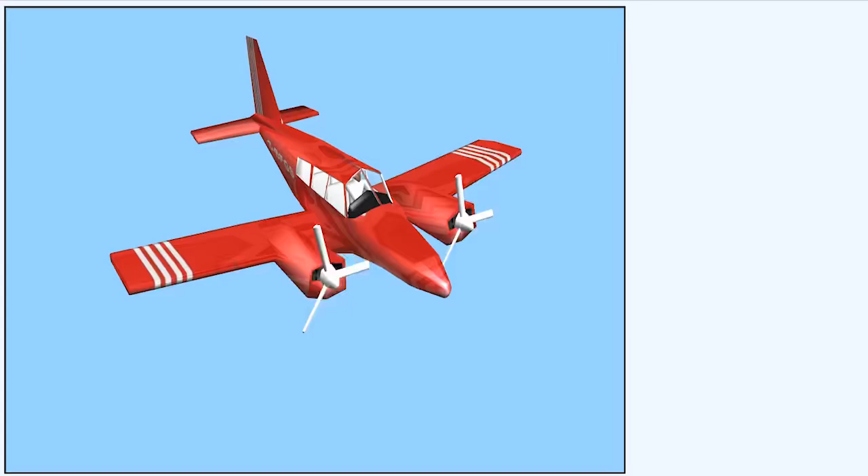Should an engine fail in flight, its propeller control unit would sense a drop in RPM, and, in an attempt to maintain the pilot's selected RPM level, would move to the underspeed or fine pitch position. Centrifugal moments acting on the blade would cause it to rotate towards fine pitch.

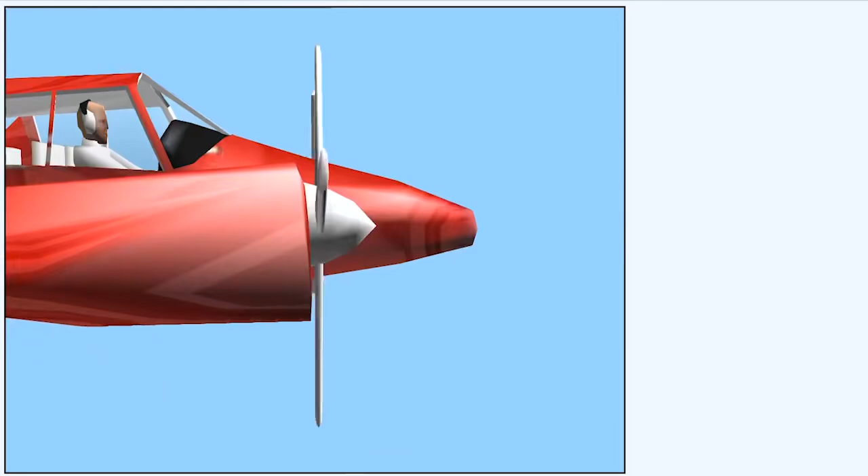This would result in the propeller being put into a windmilling situation, with its pitch change piston abutting the fine pitch stop. The immediate result of this would be a very large asymmetric drag, which would yaw the aircraft violently towards the failed engine.

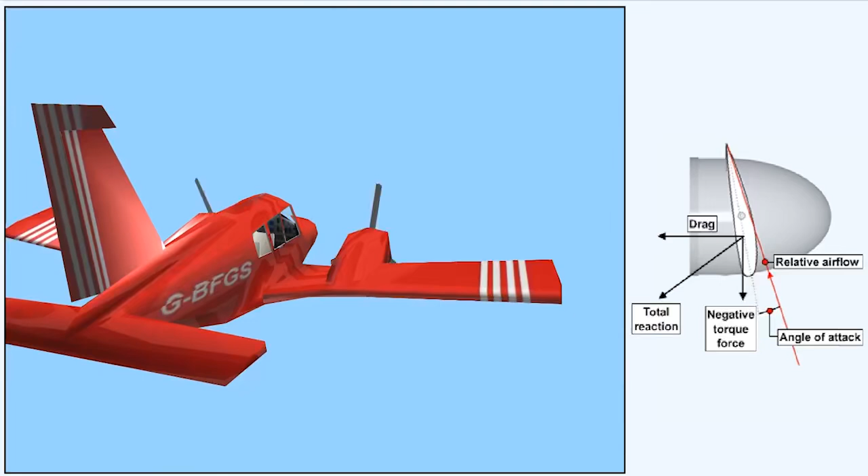A second possibility, if the propeller continued to windmill and drive the engine, could be a complete mechanical breakdown of the engine, and even an engine fire.

So, to minimize drag, and also to prevent further possible damage to the engine and the aircraft, some propellers, particularly on multi-engined aircraft, are provided with a means of turning the blades edge-on to the air flowing over them. In this edge-on position, where no aerodynamic force is generated either forwards or backwards, the propeller will cease to rotate.

This action is called feathering the propeller.

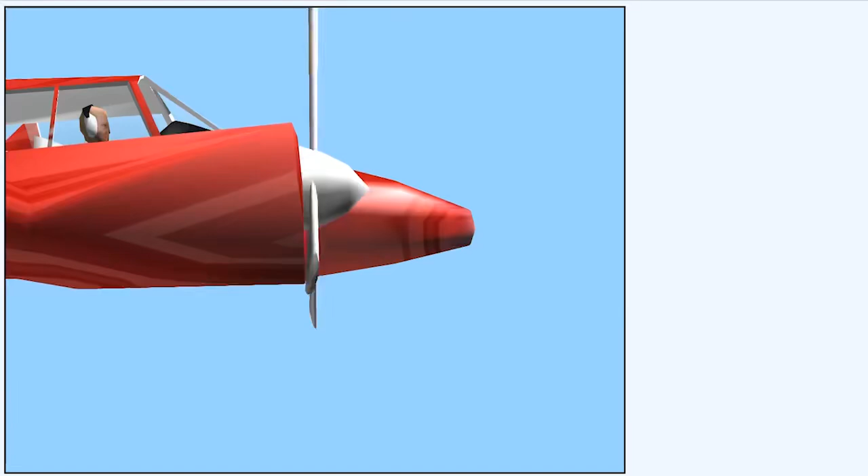If the engine had actually failed, there would be no requirement to unfeather its propeller. However, propeller manufacturers usually provide an unfeathering facility, by means of which, if appropriate, an engine restart may be attempted. This may be a requirement following asymmetric flight practice.

The operating principle of the propeller control unit incorporated in a feathering propeller is similar to that previously discussed, in that the unit contains an oil pump to boost oil pressure delivered from the engine or reduction gearbox, and a hydromechanical governor for RPM control.

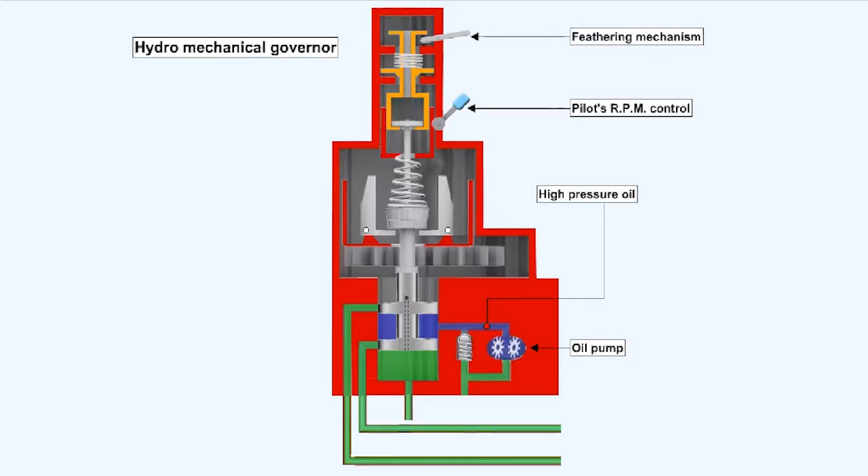There is, however, the addition of a feathering mechanism, the operation of which will be discussed progressively throughout the lesson. Control units with feathering mechanisms may be found on both turboprop or reciprocating aero engines.

Dependent on the manufacturer and type of propeller system, the controller may be known as a propeller governor, a constant speed unit, CSU, or a propeller control unit, PCU. For the remainder of this lesson, we'll refer to the unit as the propeller control unit, or PCU.

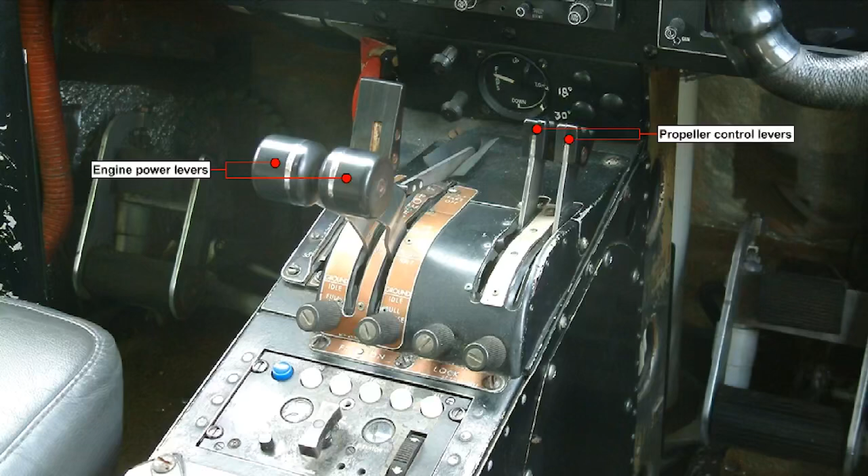The controls available to the pilot are, again, dependent on type. Most spark ignition piston engines, and many turboprop engines, are equipped with a twin-lever cockpit arrangement, whereby the pilot has separate engine power and propeller control levers.

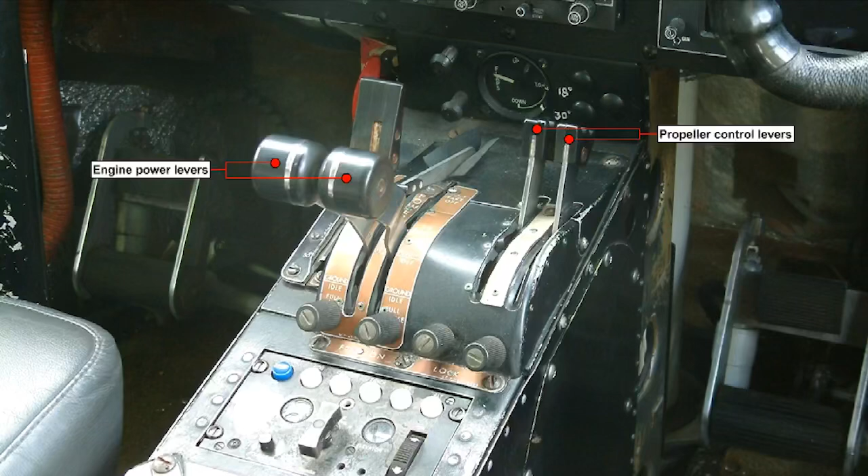In this arrangement, propeller feathering can be manually achieved by moving the propeller control lever to the feather position, or on some aircraft, by means of a separate feather lever.

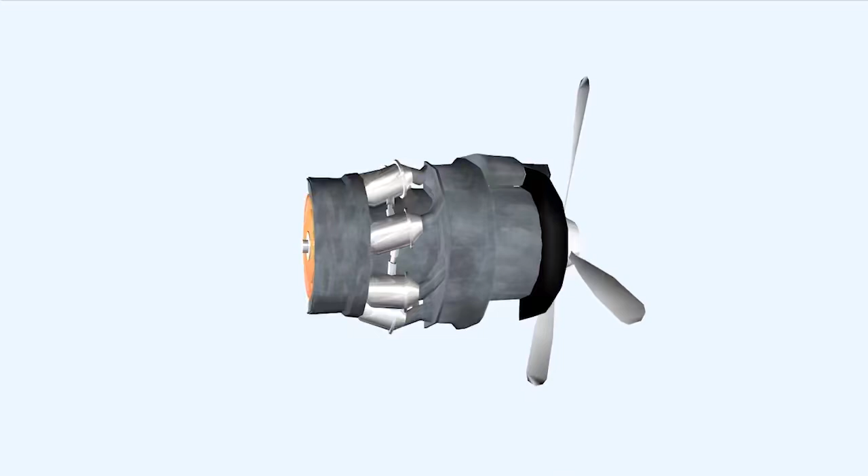Some turboprop engines utilize a single lever arrangement, whereby the pilot is provided with a power lever only. In this arrangement, propeller pitch, RPM, and engine fuel flow, power, are simultaneously adjusted. Feathering may be achieved by moving the engine high-pressure fuel cock to the feather position.

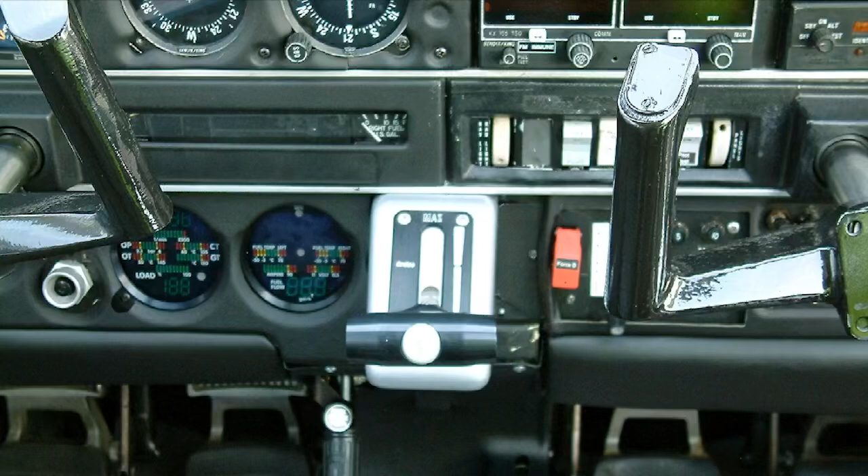New generation reciprocating engines equipped with Full Authority Digital Engine Control, or FADEC, also use a single lever arrangement, whereby the pilot selects the required power setting and the propeller pitch angle is controlled either electronically by an electronic engine control unit or by a hydromechanical control unit.

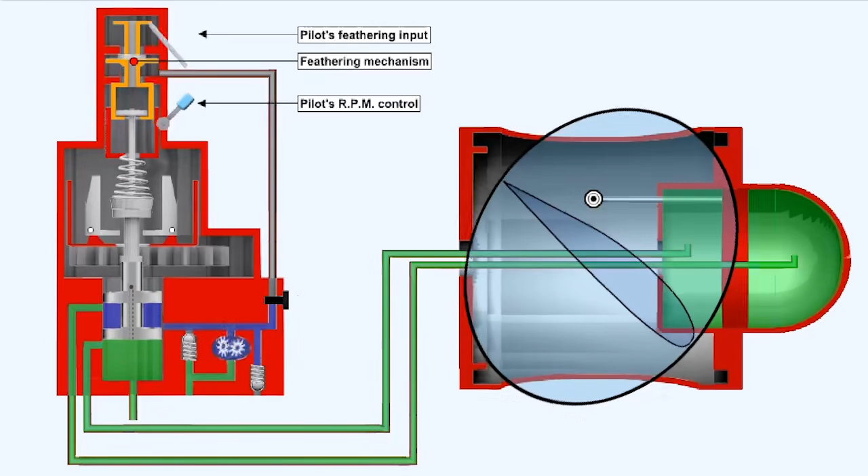The feathering mechanism provides a means of manually lifting the landed valve to the overspeed or coarse pitch condition when the appropriate control is moved to the feather position.

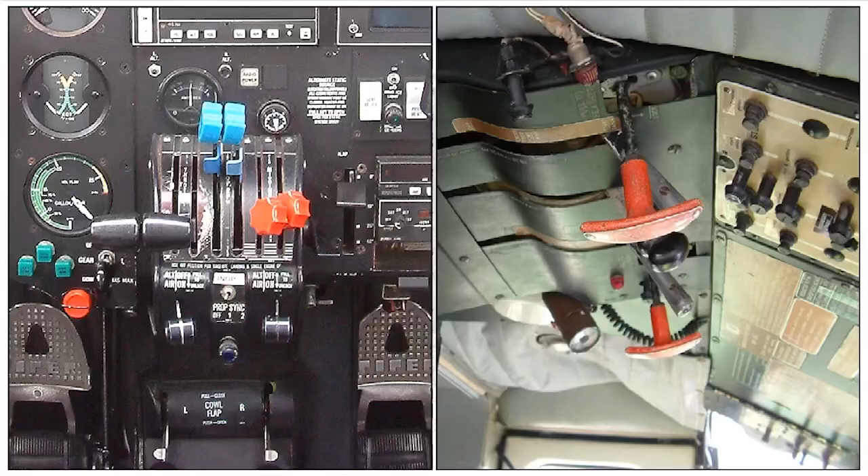The actions required to feather a propeller are dependent on the type of engine and propeller combination and the type of aircraft they are installed in.

For single-acting propellers, this normally involves moving the propeller condition lever, or RPM lever, to the feather position.

Moving the appropriate lever to the feather position mechanically lifts the landed valve against the speeder spring to its highest position, thereby simulating an exaggerated overspeed condition.

The landed valve will remain in this position until the feathering control is moved back to its normal position. Any oil in the pitch change cylinder can now drain away, allowing the spring or gas pressure, assisted by counterweights, to move the piston onto the feathering stop.

To unfeather the propeller, the speeder spring tension is released by moving the propeller control lever to a position comparable to that of the serviceable engine, which of course is running at normal operating RPM. This moves the landed valve down and connects the reserve oil pressure line to the fine pitch side of the propeller pitch change cylinder.

A reserve of oil pressure may be supplied by means of an accumulator, which is charged continuously during normal operation. By activating a release valve, oil pressure from the accumulator is directed to move the pitch change piston to fine pitch.

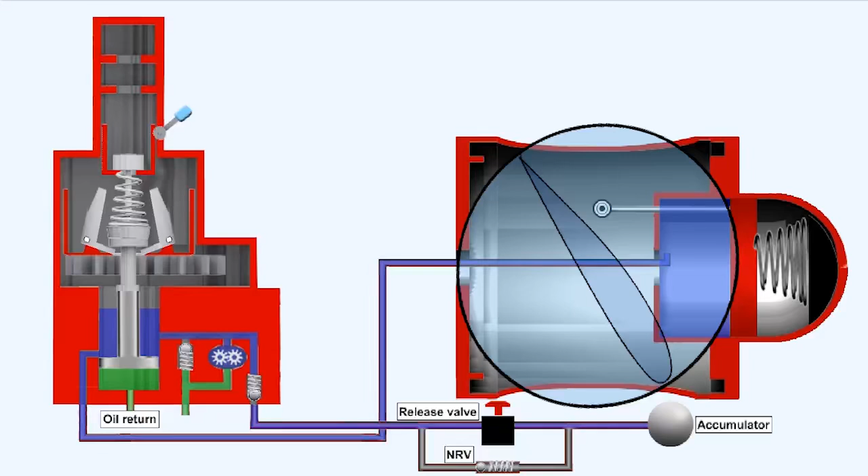Alternatively, some systems may utilize an electrically operated unfeathering pump, or on some smaller systems, the engine may require motoring over on the starter to build up sufficient oil pressure. Once the propeller blades have moved away from the feathered position, the propeller will start to windmill, and as long as the engine has fuel and ignition, it should start.

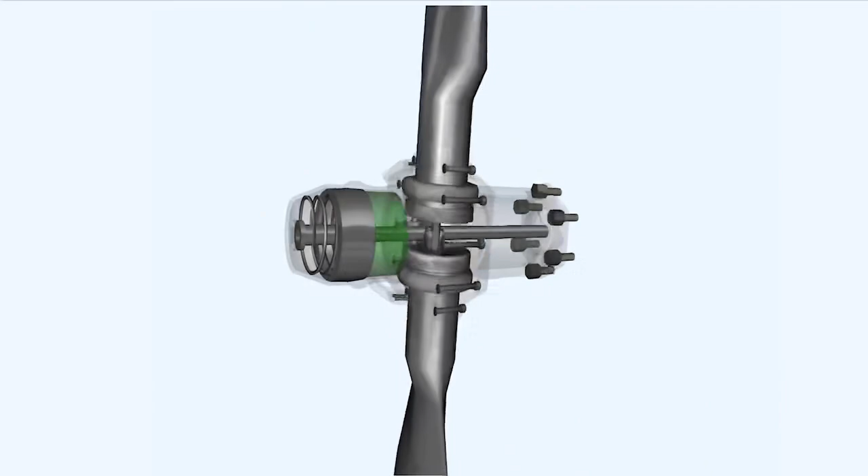When an engine fitted with a single acting propeller is shut down after flight, the propeller should be at the fully fine pitch position. There is a considerable quantity of oil trapped under pressure on the fine pitch side of the piston in the pitch change cylinder, which is holding the propeller in the fully fine position. This oil pressure is being opposed by the force of the feathering spring.

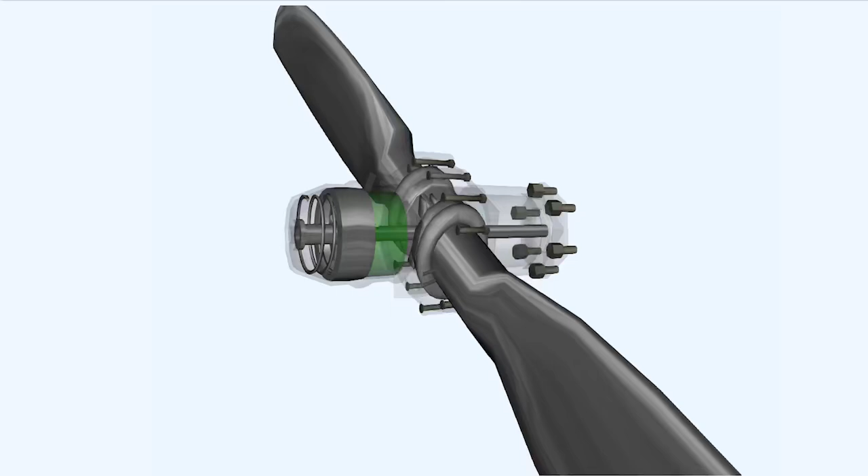After engine shutdown, the trapped pressure will gradually leak away past the landed valve in the constant speed unit. As this trapped hydraulic pressure leaks away, the feathering spring is able to slowly push the propeller blades towards the fully feathered position.

While this condition would be acceptable to a turboprop with a free power turbine, it would result in an unacceptably high loading on the starter motor of a piston engine or direct coupled turboprop. So, to prevent the feathering spring pushing the blades all the way to the feathered position, on those engines where a feathered propeller would cause stress on startup, centrifugal latch pins are incorporated in the pitch change mechanism.

The latch pins are held disengaged by centrifugal force while the engine is running. As the engine RPM reduces, small springs behind the latch pins overcome centrifugal force, and they are allowed into contact with the piston mechanism. Typically, the value of the RPM at which the latch pins become engaged is around 650 to 700.

After engine shutdown, the latch pins engage with a groove in the piston mechanism, which locks the piston. This prevents it from being pushed beyond a predetermined blade angle, and further into the feathered position by the feathering spring.

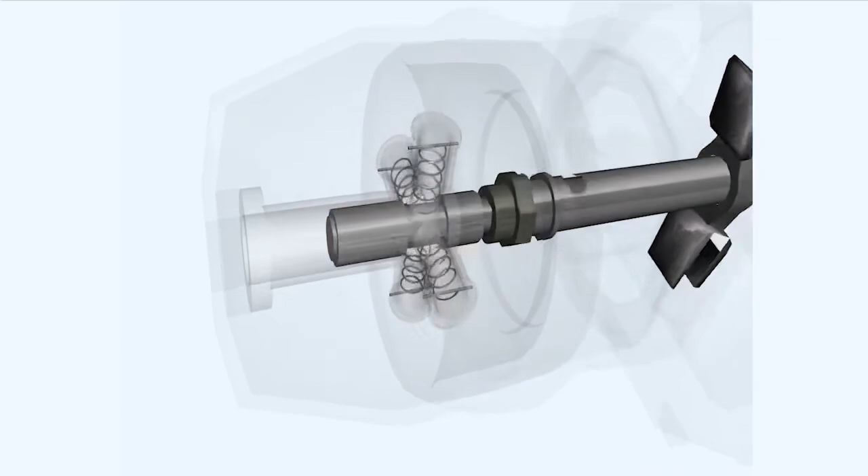When the engine is started and RPM increases, centrifugal force will disengage the latch pins. Fine pitch oil will quickly build up and hold the propeller against the fine pitch stop.

Note that if a propeller engine combination does have a centrifugal latch mechanism fitted, it may become impossible to feather the propeller of that engine once its RPM has fallen below the latch setting value. This is because once they are engaged, the latch pins can prevent the piston being moved any further by the feathering spring. It is thus extremely important to complete the feathering drill before the RPM decays below this figure.

Double-acting propellers do not have springs or gas pressure to assist in changing propeller pitch. Thus, all of the actuation, both to fine and coarse pitch, must be hydraulic. Engine or reduction gearbox oil is once again used as the hydraulic medium for this purpose.

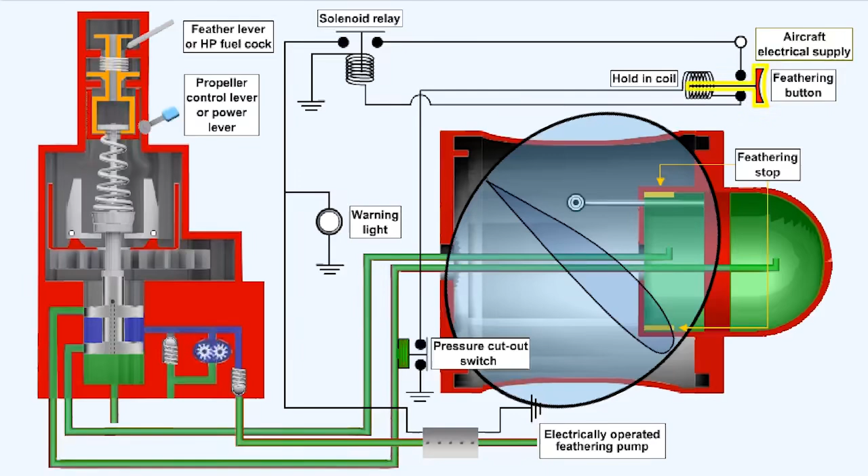With the exception of operating the feathering pump, the basic control selection for feathering the propeller remains the same. That is, selection of the propeller control or condition lever, operation of a separate feathering lever, or on some turboprop systems, moving the HP fuel cock to the feather position.

For the purposes of this lesson, we'll consider that we are feathering a propeller which has twin lever control. The propeller control lever is brought back through the fully coarse position to the feather position. Alternatively, where fitted, the propeller feathering lever is operated.

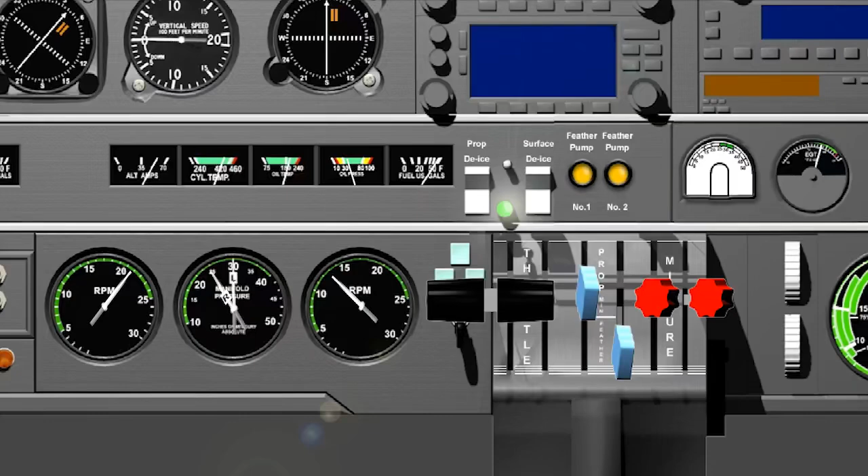This action lifts the landed valve in the propeller control unit upwards, thereby connecting the feathering pump oil line to the coarse pitch side of the pitch change piston, and allowing oil to drain from the fine pitch side of the pitch change piston.

The feathering button in the cockpit is pushed in, energizing the feathering pump solenoid relay to supply the feathering pump. It also energizes the holding coil, which keeps the feathering button depressed for the time being.

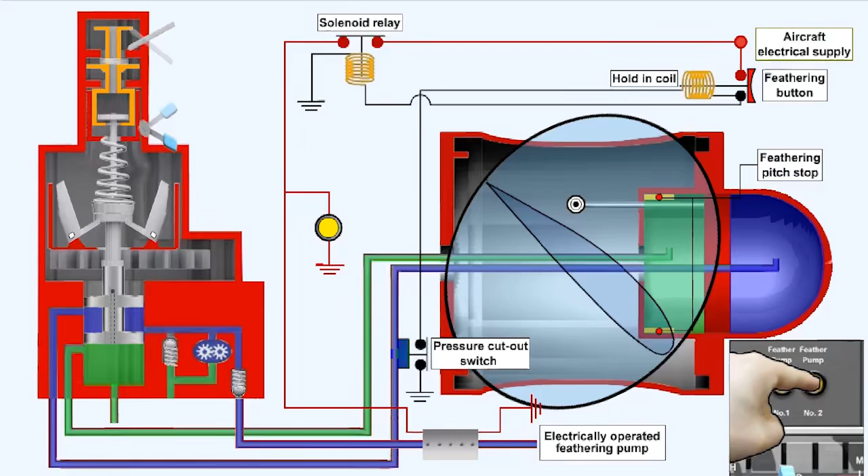Feathering oil now passes through the ports of the landed valve, pushing the pitch change piston so that it moves into contact with the feathering stop.

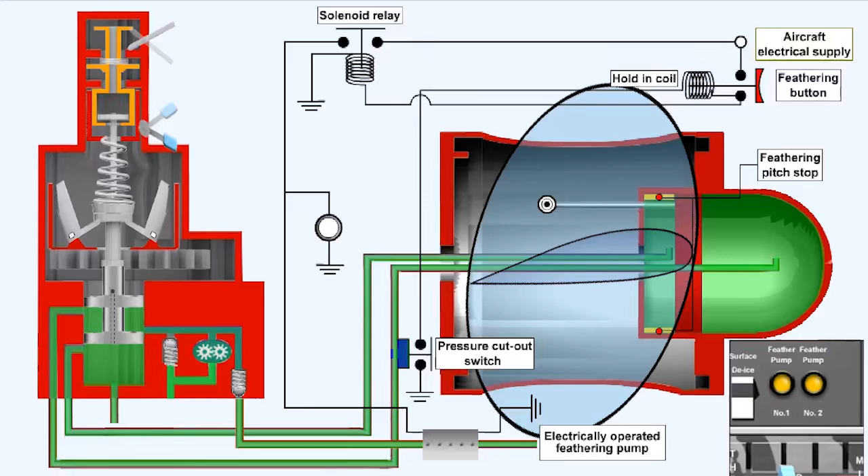Oil pressure will now build up within the system, eventually operating a pressure-operated cutout switch, which will interrupt the supply to the feathering button hold-in coil. This causes the feathering button to release, which terminates the supply to the feathering pump solenoid relay, which in turn breaks the supply to the feathering pump.